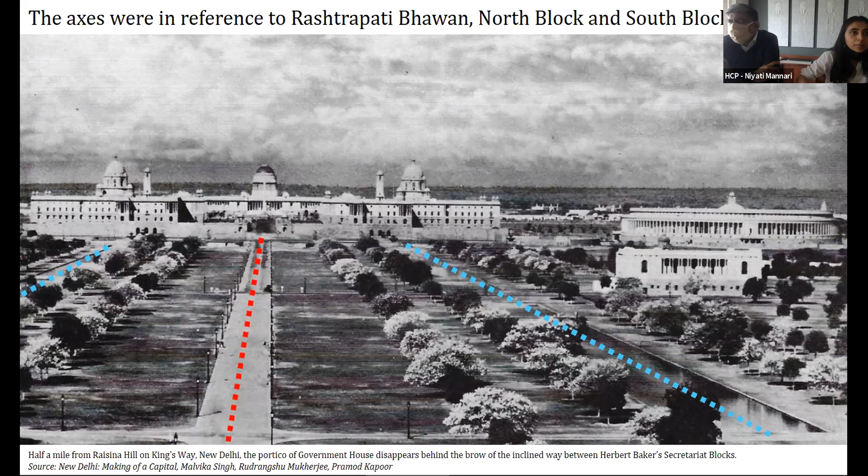So when we reconstruct what was there just before independence, this is how the space was, and this is how the axes were. Now what exactly happened after independence to Central Vista Avenue?

The three axes still hold a lot of significance, but there are a couple of major additions that happened over a period of 70 years. We see the Rafi Ahmad Marg that came up later, the metro stations that are pretty recent additions to this place, the toilet blocks near Vijay Chowk, and at the far end, the National War Memorial.

All said and done, despite all of these additions, this still remains a great icon to the Indian Republic, a great tourist attraction for Delhi and at a national level, and a precious civic garden for the residents of Delhi.

However, having said all of that, the avenue currently is under much stress, lacks amenities, and is in a state of disrepair. So let's come down to the proposal.

For the proposal, these are the six objectives we laid out: refurbish, strengthen, and restore its landscape; provide amenities; make it more pedestrian friendly; provide space and facilities for vendors; ensure arrangement for national events; and ensure the integrity and continuity of the avenue's original design.

This is what Central Vista Avenue is today. We have Vijay Chowk on one end, India Gate on the other, Rajpath in the center flanked by lawns and canals on both sides, and some underutilized areas behind the canal. Let's go through each of these layers one after the other.

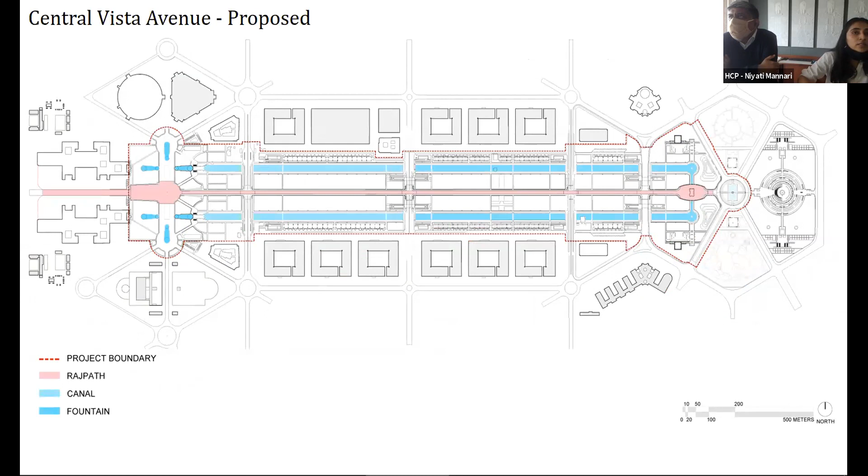This is the entire project boundary. We have Rajpath, shown in pink, the canals and fountains at Vijay Chowk, and the historic elements mostly near Vijay Chowk, but also India Gate on the other end. We have the axes, the primary and secondary roads, and the parking areas, which are completely landscaped.

We have paths and plazas along Rajpath, and paths and plazas elsewhere across the entire spread, underpasses at two areas, amenities and vending zones, grass mounds and step plazas, and presidential dais for the Republic Day parade.

We also have lawns, the existing trees, and the proposed trees. When we put all of this together, this is what we get - the overall master plan for the Central Vista Avenue as it is going to be proposed, with all the components that fall into it.

Now, when we look at the section, this is how the whole space would look like. We have the Central Secretariat campuses on both ends, with Rajpath in the center, and we can see the Rashtrapati Bhavan and North South block in the backdrop.

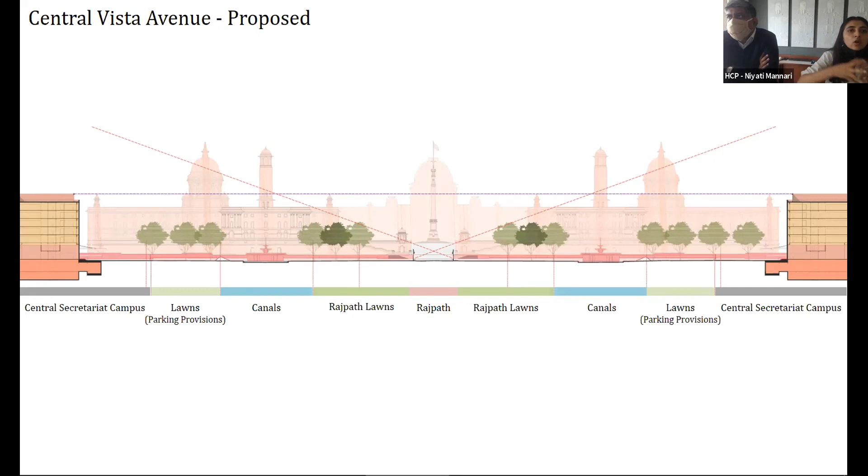We have lawns on both ends, canals, the lawns with parking provisions on the other side, and so on. For better understanding of this entire project, we have divided it into three main zones: the Vijay Chowk precinct, the typical avenue, and the India Gate precinct.

So we start with the basic land use. The overall land use of the space looks something like this, with these underutilized areas behind the canals, which we don't see from the main photographs or the forefront of the entire avenue. So this is how the area looks like.

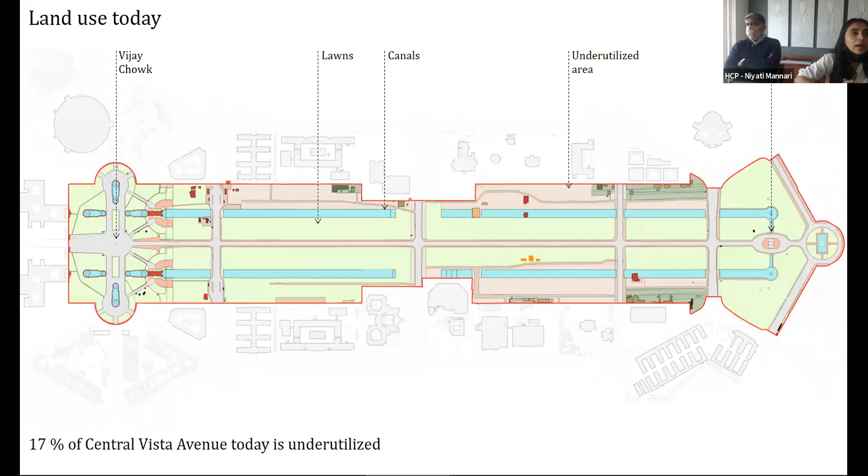There are many other areas behind the canal that are pretty underutilized and poorly maintained. All in all, the land use today has around 17% underutilized areas, the ones behind the canal. And all of this would be appropriately landscaped and well utilized in the master plan.

Now coming to Rajpath. When I'm talking about the next segments, I'll zoom in to this particular red box that you see here to have a better understanding of what exactly we are trying to do and what the whole intent is.

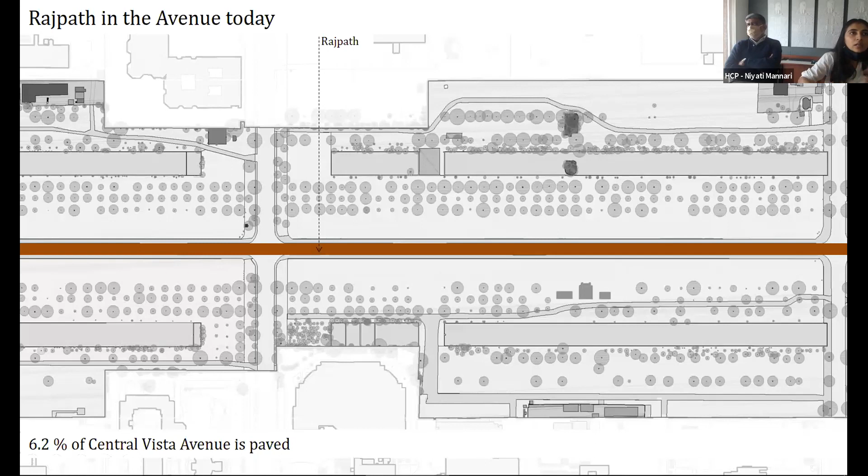What we intend to do is have paved walkways along its edges. The Rajpath you see today has these loose bajri edges. And this is what we intend to do instead: red granite walkways, with bollards, light poles, signages, etc. on one of the edges, and water channels for drainage from the lawns especially.

Now the Rajpath lawns. The lawns are actually worn out by pedestrian traffic. They lack modern water-saving infrastructure for watering. Their surface slopes are inadequate, and they are heavily disrupted during the Republic Day parade arrangements, which lasts almost a quarter of the year. So the Rajpath lawns today are spread across something like this.

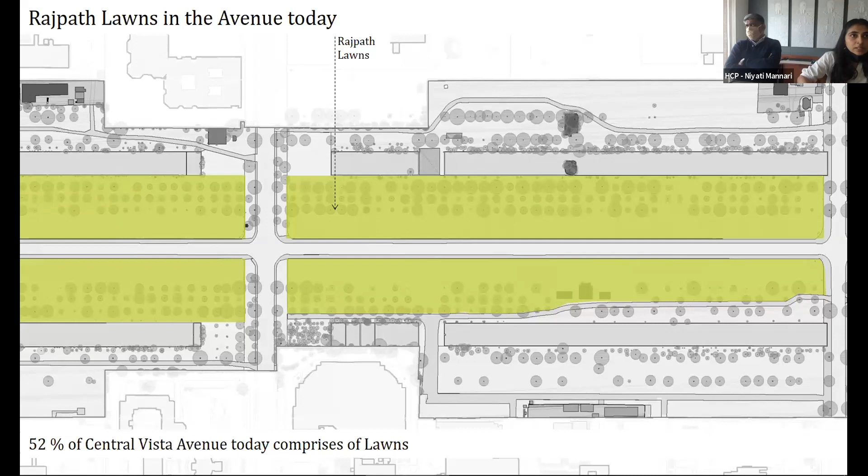What we intend to do is have it well laid out, cover a larger area than present, and make it a little more convivial for pedestrian usage. So we add a couple of walkways along its edges, as well as a few perpendicular ones. This refurbishment, along with these walkways, would eventually liven up the space.

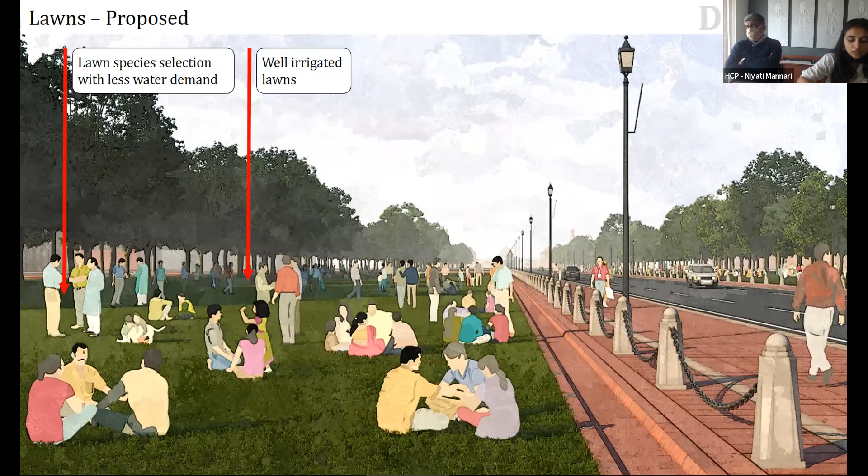So the lawns that we see to be like this today would eventually be like this: well irrigated lawns, with species selected which use much less water. Perpendicular walkways would be present at some locations, and we would have water channels for stormwater drainage, as I mentioned earlier.

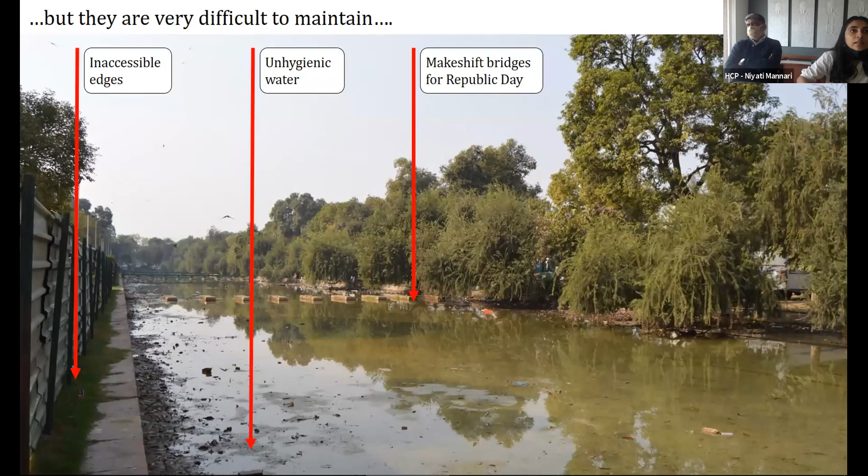Now talking about the canals. These are very much used for boating at particular areas along the entire stretch, and for swimming during the summer, but unfortunately they are difficult to maintain. They have some inaccessible edges, the water is unhygienic, and there are makeshift bridges put up temporarily for the Republic Day parade. They also lack a reliable source of water, so they are dry quite a few times of the year.

Tree plantations and other features don't allow you to easily promenade along this beautiful water feature. These makeshift bridges are done for the Republic Day parade, and this high number is right behind the VIP and VVIP seating enclosures, so you suddenly see a huge number of temporary bridges put up.

So the avenues and canals are actually very important features, but they are poorly maintained and not easily accessible. What we intend to do is have refurbished canals with walkways along them and bridges at close intervals. These bridges would also have a dual purpose, being used during the Republic Day parade celebrations as well. We also have a green buffer here, which I'll come to in the 3D visualization.

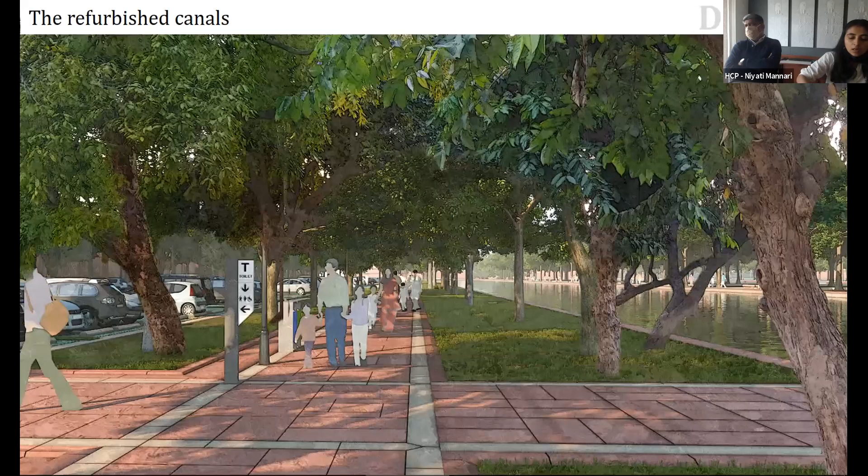So the refurbished canals would look something like this. We have a green buffer here, keeping the existing trees in mind. We would like to have minimum transplantation of trees because of any intervention that we do here, so the green buffer is in that regard.

And then we have the walkways to promenade along the canal, then a strip for utilities such as lampposts, signages, dustbins, etc. And then another green buffer eventually that leads to the landscape parking area, but that green buffer is again owing to the existing trees.

So as I already mentioned, we have— Niyati, can you go a little slow? It's fine, sure, you don't need to hurry. Just explain and pause at the key slides. Don't run. Sorry, so I'll keep it slow.

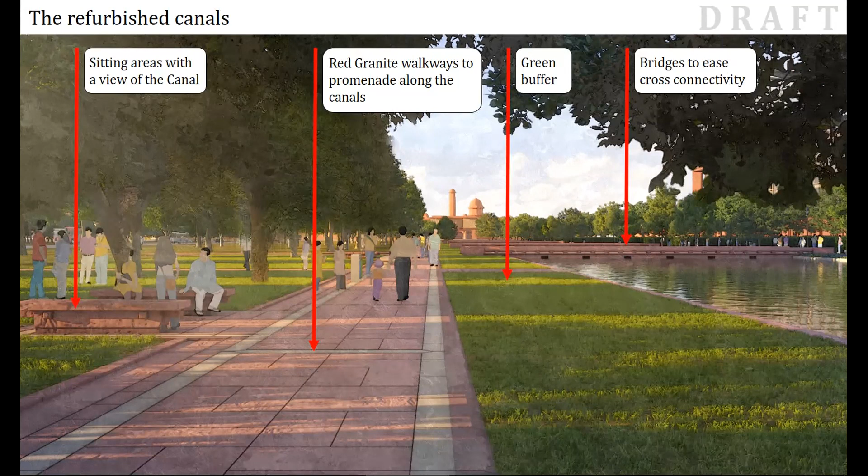So we basically have these bridges for cross connections, and then the green buffer. A few places don't have trees along that, but we'll of course maintain the green buffer. Then you have the red granite walkways to promenade along, and a few seating areas with a view of the canal to be enjoyed.

So we only see public conveniences near Vijay Chowk and a couple near India Gate. When we map it out, this is how it looks. We have 2 toilet blocks here and 2 toilet blocks here, and they're of course insufficient for the amount of area and footfall it witnesses.

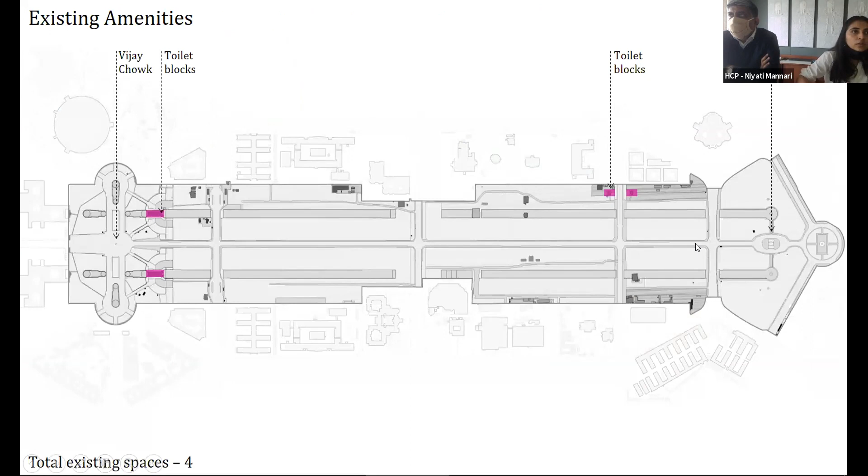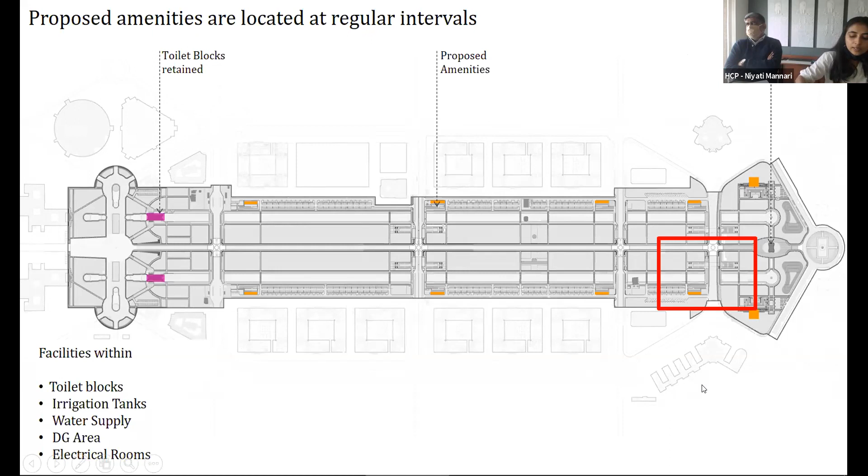So what we propose is to have all of these in orange that you see as the proposed amenities, and these are the toilet blocks that we would like to retain. These facilities basically have these many facilities within them - toilet blocks and all the services as mentioned in the slide in this particular place. Now I'll be zooming into this red box to see exactly what the design is.

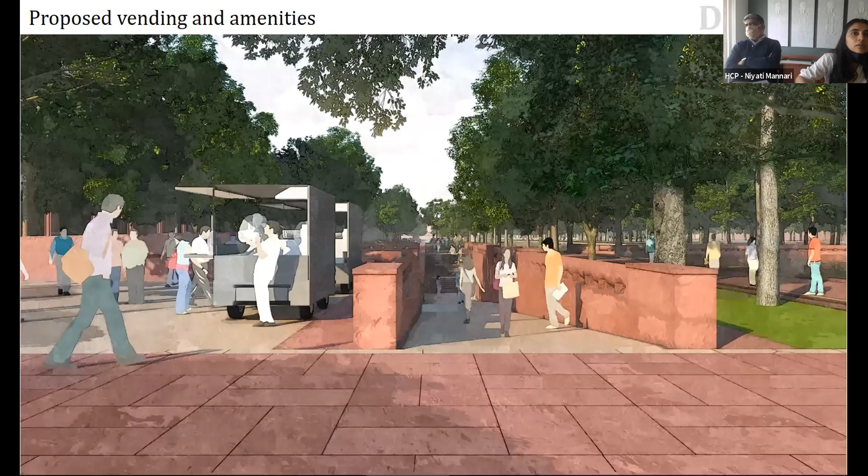This is the area where you have access to the lower level amenities. The organized vending plaza, as I mentioned, would be here. And this is going to be quite a shaded area because of the existing trees and also some of the proposed ones.

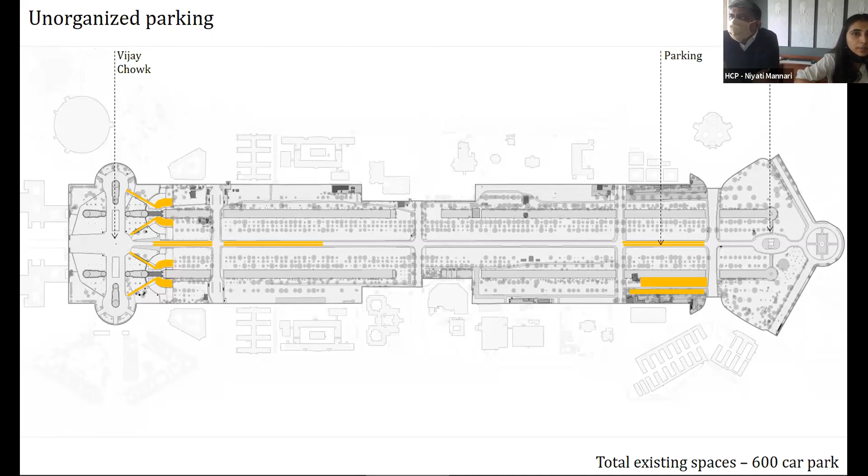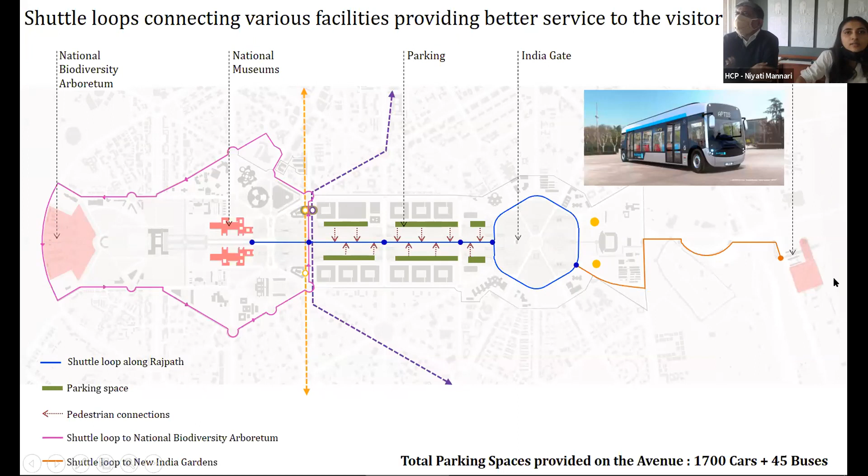So the area behind the canals that is currently underutilized is eventually imagined to be a space like this - a very landscaped area which could be dually used during national events and special events that need a lot of parking spaces. This will be shaded parking bays with grass paver parking bays and the driveway also made in grass pavers.

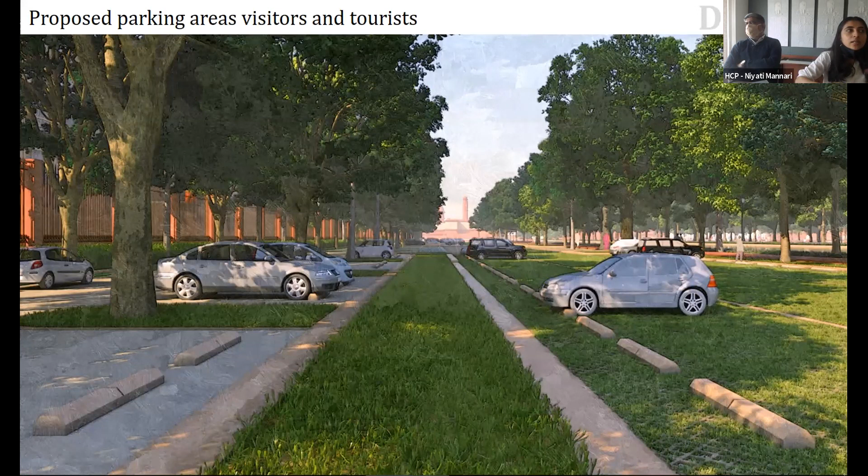The proposed parking areas for the visitors and tourists would actually have a green buffer. The other side of the entire parking space would be like this - you have the driveway, shaded parking bays and the green buffer as well.

So the area again in question beyond the canals looks something like this today, and this is the connection that we are providing with the parking space. You can see the green parking here, and then you have the pedestrian connections, and the rest I've already mentioned.

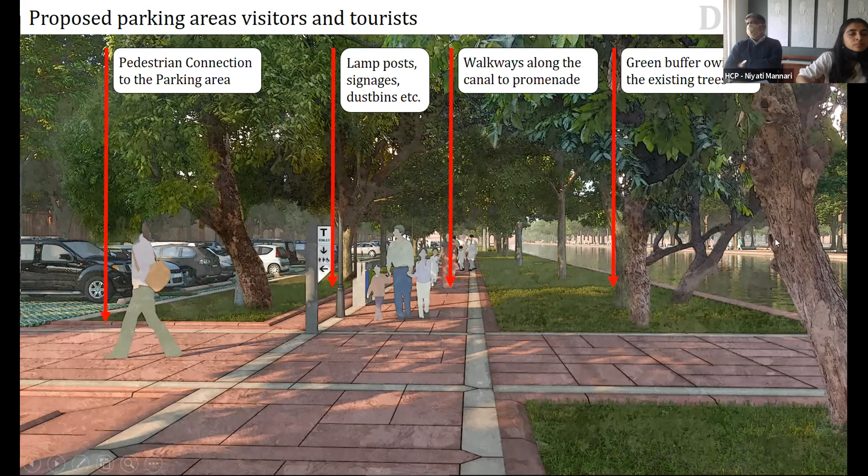The pedestrian underpasses that we would like to propose are at these two locations - the Janpath Rajpath junction and the C-Hexagon Rajpath junction are the areas where we are proposing these pedestrian underpasses. And when we zoom in, this is how the underpasses would look like.

The design of the underpass has been done in a way that it falls between the existing rows of trees, so there's minimal tree transplantation that happens because of anything we intervene with here. So this is how the underpass looks - you can see the stairs, the landing, the entire area that goes below, and then you have this entire space that is below Janpath, and then you can just come out from this particular space.

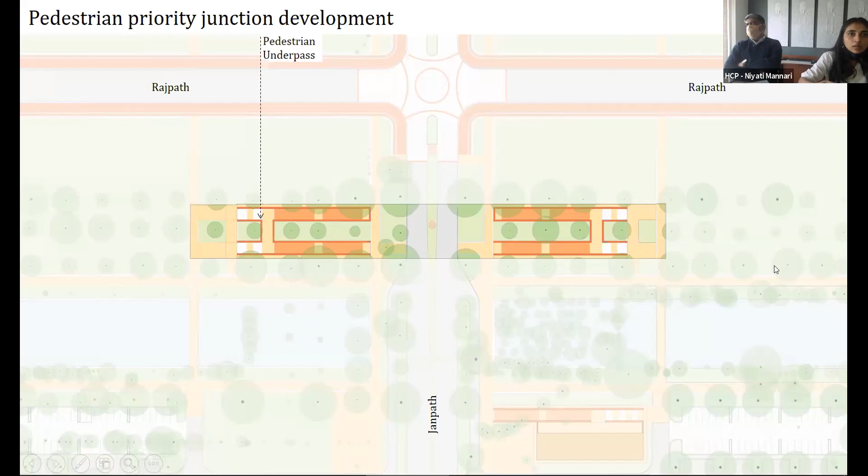So how this has been designed is something like this. We have a 2-meter buffer that we are considering from the existing tree trunks, and the whole area has been designed and placed accordingly.

So the area between the avenues of trees would eventually look something like this. We have the underpass at the junctions, shaded by the trees on both sides, with signages and more utilities such as lampposts edging it.

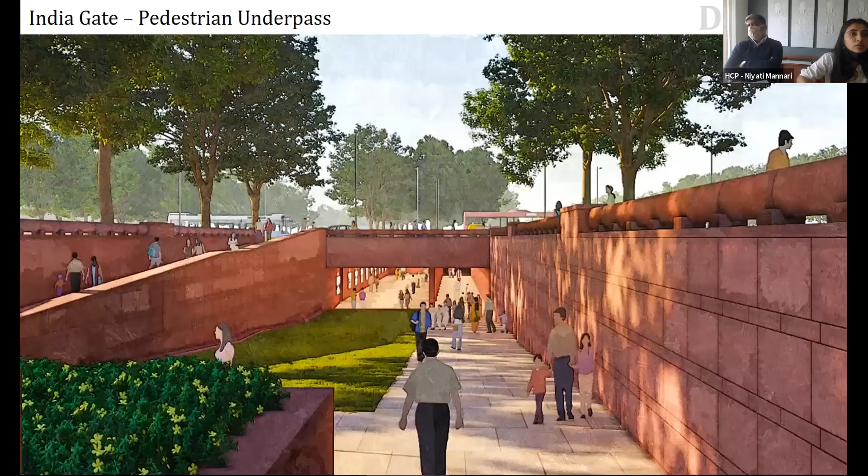Another view of how this space could look from a different angle would be something like this. And from within, or rather below the roads, this is how the space would be, which can also have a dual purpose of hosting exhibitions and small artistic gatherings.

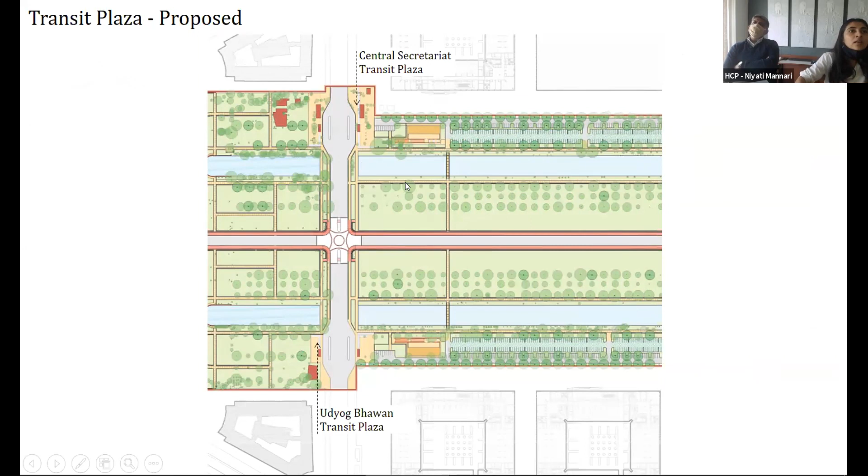And this is the area in reference. The area that looks like this today, we eventually intend to make a little bigger, like a plaza, with more facilities and utilities for people to have a better convivial space there.

This is the transit plaza. You can see the Central Secretariat exit gate here. There are organized vending spaces, public utilities such as benches, ramps and stairs for universal design access, and bicycle and Yulu stands. You also have a separate bus lane and another service bylane for paratransit modes of travel.

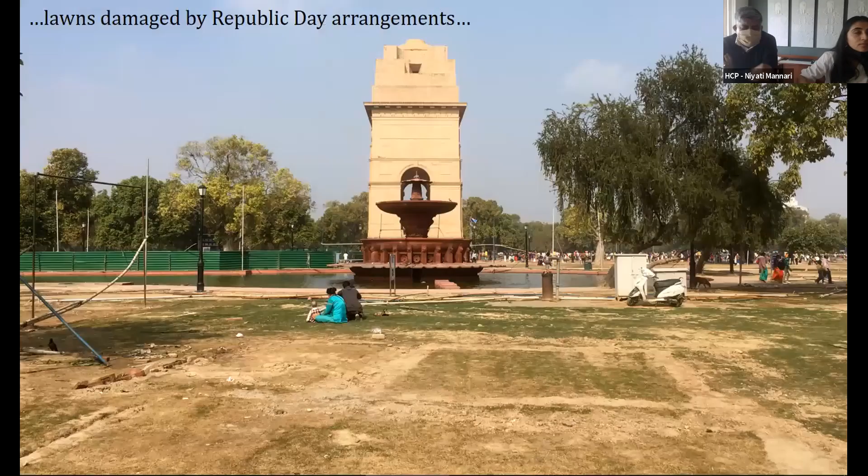But the area is still ill-equipped to handle this footfall. There is barricading for security purposes, temporary check-ins and security kiosks for entry and exits in this area, and the lawns are damaged by Republic Day parade arrangements.

You have India Gate parks on both sides, with landscape elements such as step plazas and grass mounds, with amenities behind these plazas as well. There are also more landscape elements that we'll see in the visuals further.

When we talk about the pedestrian underpass, these are the underpasses we are planning. C-Hexagon sees a huge amount of pedestrian traffic and becomes unsafe for people to use. When we zoom into this space, the basic fundamentals and principles of the design remain the same—we have designed it between the rows of trees.

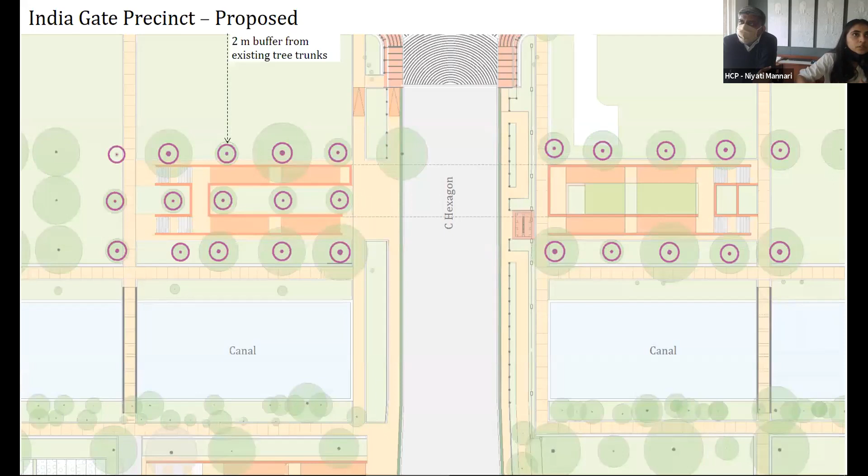The shaded part remains as it is, with minimum tree transplantation there, and the 2-meter buffer. This is how the whole space looks from below the ground level. This is the area in question.

So basically the whole idea of this underpass is to not just be a transit mode, but a public space in itself. The width, the facilities within it, the well-lit, well-ventilated areas have been designed in such a way that it does not seem like just a mode of transit to cross the road. That's not how we have thought about it—this is going to be a public space in itself.

Now talking about the India Gate Plaza. This is how the street that leads to India Gate looks like today, and this is how we envision this space to be. The plaza would be wide to accommodate the footfall, with motorable paving for national events, and hydraulic bollards that can go down only during national events.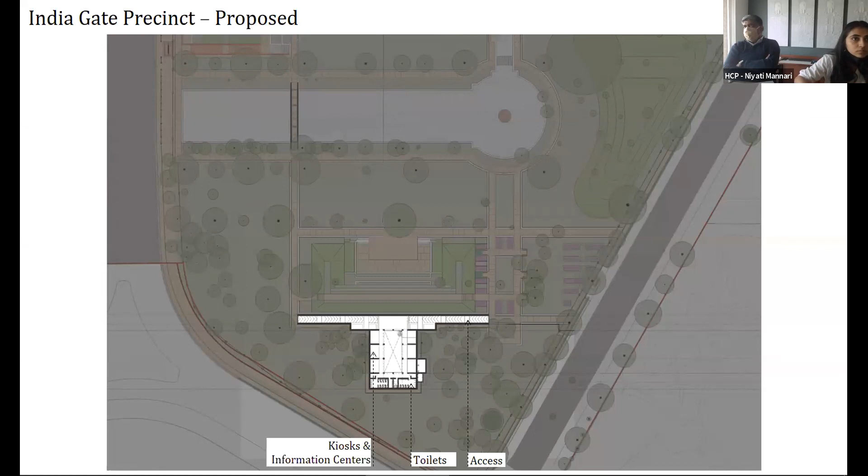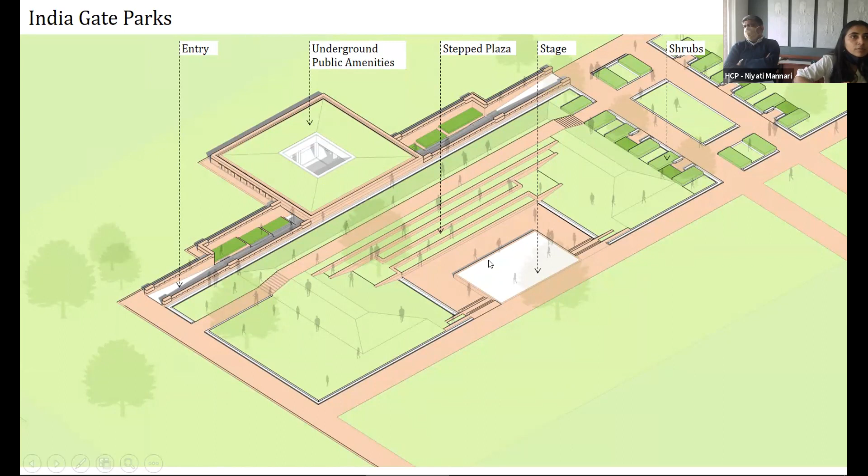This is another isometric image of the same. This is the stage for the step plaza, this is the seating area, we have shrubs and planters on this end, and walkways connecting this entire space. This is the entry to the underground amenities, and we have the green buffer on that end too. When we look at the area below ground level, this is how the space is, with a courtyard in the center and all the facilities on either side.

So the area that looks something like this would eventually be looking like this. You have India Gate here behind the trees, the grass mounds that surround the India Gate Step Plaza, and the entry to the amenities here. This is the entire space.

Another angle of the same area, and this is where we intend to have the step plaza, the stage for performances. This does not have to be a very formal space. It will just have India Gate as a backdrop, but it will be a public space for people to enjoy, for light performances and for regular daily usage as well.

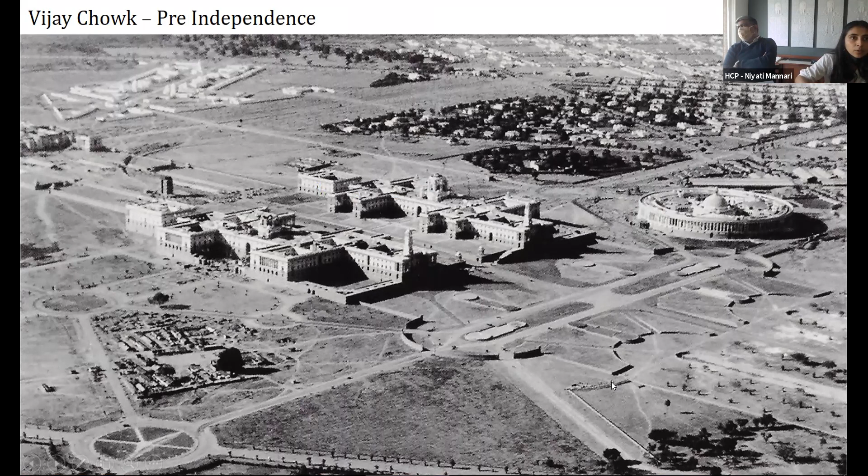Now coming to the Vijay Chowk precinct. A few beautiful images of Vijay Chowk pre-independence. This is one of those areas, this is Vijay Chowk here. We have the parliament, north and south block, and the rest of the area was not developed at that point. This is how the space used to look like.

We have stepped arches here, 3 arches that are currently hidden by the increase in road levels. I'll talk about it further once we reach there. This is how the whole space looked like, and this is one of the early images around independence, somewhere between 1947 and 1950. This is how the space looks like today.

Vijay Chowk's original formal grandeur and austere beauty has been much marred by unthoughtful additions and alterations. This project basically intends to restore the heritage character of Vijay Chowk. These are the 6 things we intend to do in order to restore that heritage character. I'll go through them one by one.

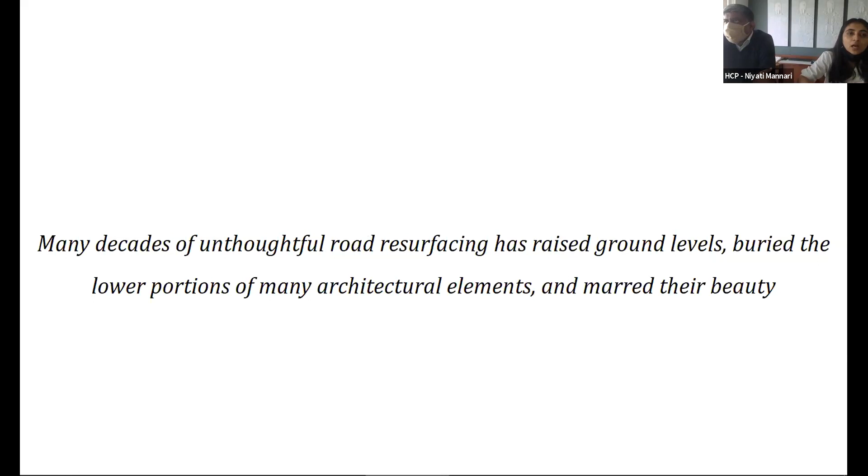Many decades of unthoughtful road resurfacing has raised ground levels, buried the lower portions of many architectural elements and marred their beauty. This is a beautiful image from 1927 showing the levels of the original road with respect to the Vijay Chowk fountains, and this is what it is today. The road has basically risen by 7 inches, making the beautiful fountain no longer visible as a whole. The three arches I mentioned used to have 5 steps, and now all we can see is these 3.

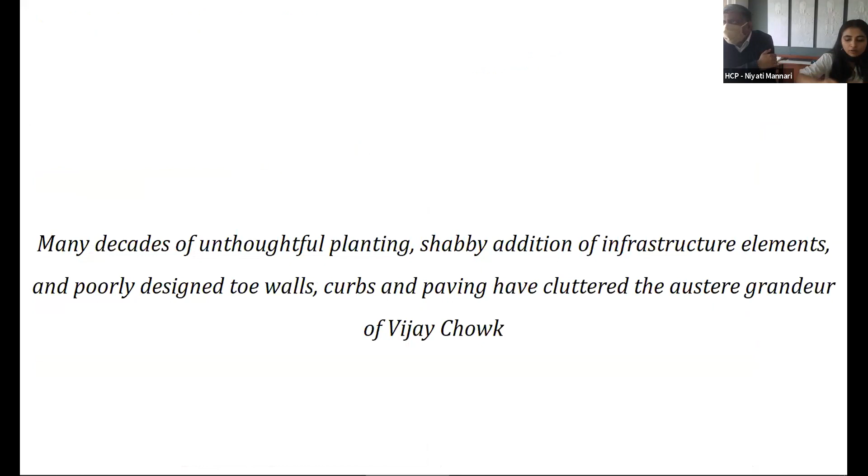So these steps are buried due to the rise in the levels of the greens, owing to the rise in the level of the roads. So many decades of unthoughtful planting, shabby addition of infrastructure elements, and poorly designed toe walls, curbs, pavings, etc. have cluttered the austere grandeur of Vijay Chowk. We'll have a look at all of those.

Now when you see here, the addition of these shrubs mar the austere grandeur of the architecture behind it. These poorly detailed facade lighting mars the architecture of the north and south block walls. Unthoughtful topiary plantations along the edges of all these historical elements can be clearly seen around the fountains and here along the toilet blocks. This is the area that leads you to the toilet blocks, and here also there are unplanned hedge plantations obstructing the access to the lawns, unnecessary addition of toe walls, and shabby road resurfacing that has been done.

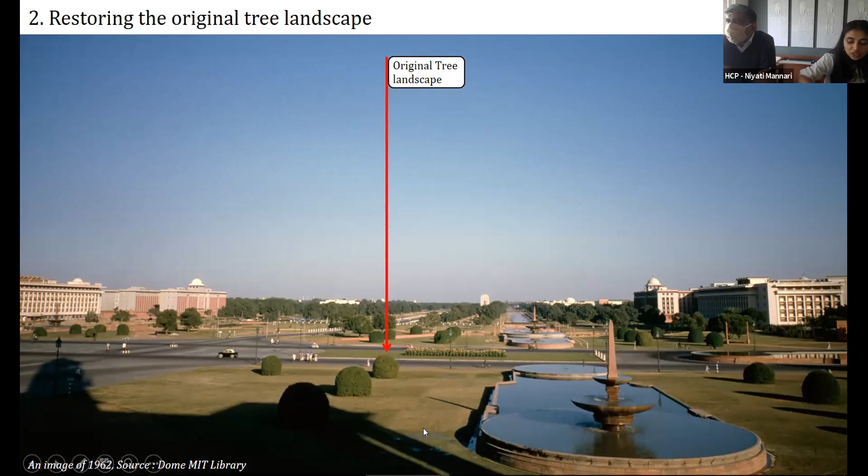This is again an image from 1962, which shows the original tree landscape around this area. Here you can also see that the road levels were pretty much at the same level as the greens, and even here you can see all of those levels pretty much there. But there are all of these additions that have happened now. So basically the unplanned plantation has marred the beauty of this entire historic precinct.

Now the original pavings and pathways will also have to be restored. So this was originally planned as a pathway, but now is an asphalt road and is serving a dual purpose of parking spaces as well.

Protective plinths will have to be added to this area to protect the heritage structures and prevent unthoughtful planting. So all of these areas where we see this ad hoc planting hiding the grand austere structures behind them need to have protective plinths basically.

An integrated, efficient infrastructure network would be laid out to ensure clean, hygienic water throughout the year. So we would intend to make the fountains functional and hygienic. There are some incoherent architectural additions also seen in this place, so those would also be worked out. There's poorly maintained water and loose cabling that we see across the fountains.

And finally, there will be improvement in the traffic management infrastructure. The badly placed canopy that you can see here mars the whole symmetry of the road. So all in all, the Vijay Chowk precinct looks something like this today.

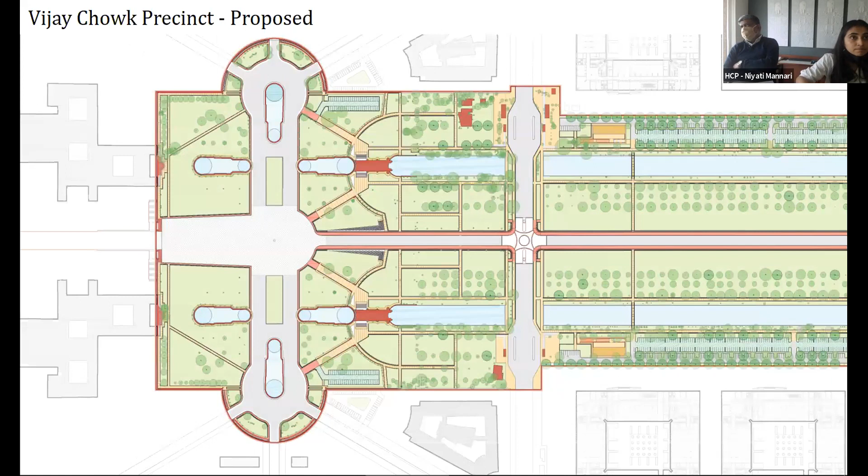And this is how we envision this space to be. When we look at it in 3D, this is how the space is imagined. We basically make the fountains functional and hygienic, improve the overall traffic infrastructure, and restore the original road levels.

We'll be removing all the ad hoc additions in terms of toe walls, hedges, and plantations that I mentioned in the earlier slides from this entire area. Protective plinths and pathways would be added, and the original paving and pathways would be brought back to their form.

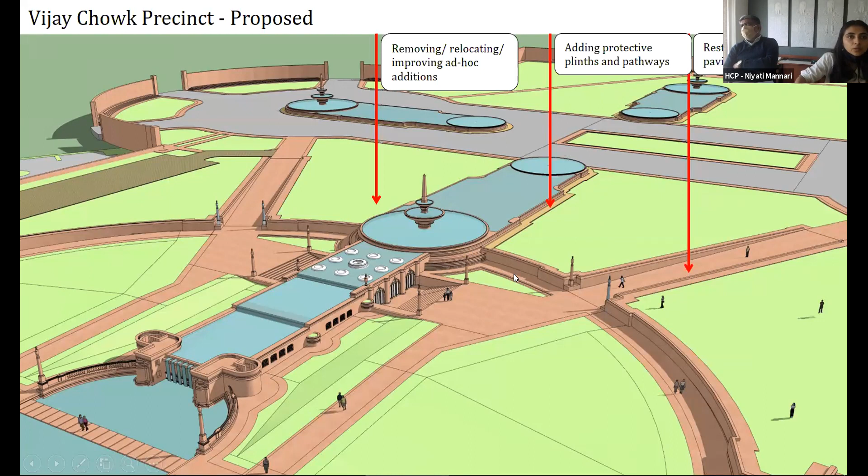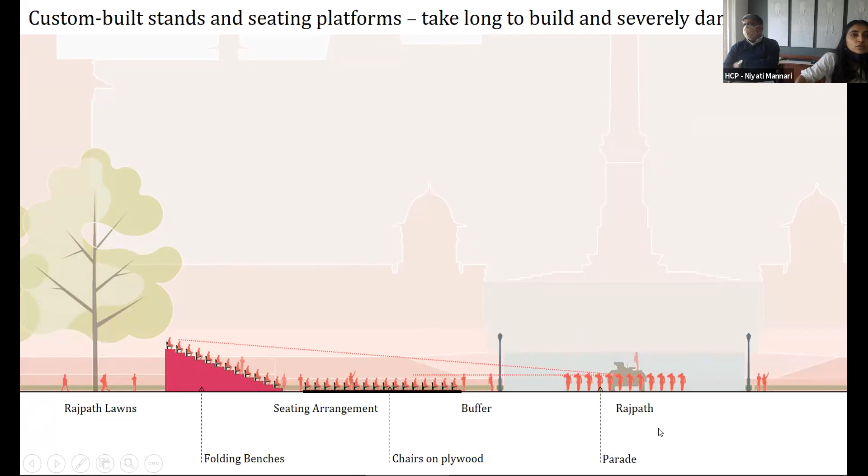In section, this is how this space looks. So you have Rajpath, you have your green buffer here, and then you have these chairs on plywood, which basically severely damage the lawns. Then you have these folding benches right behind it, and the parking and canals happen behind that. So this is how the arrangement currently is.

Standardized and rationalized arrangements for this entire area so that it takes minimum time to set up and dismantle, and does not severely damage the lawns. So this is how we envision this space to be. You have these standardized bleacher modules that are just brought in, placed on site, and easily dismantled and taken back. So it takes much less time to dismantle and set up, but at the same time, it is at a higher level from the landscape, so it does not damage the landscape.

I'll show you some 3D visualizations to understand this better. So what we see to be something like this today would eventually look something like this.

What we have here are robust crowd control measures, that is the barricading we see today, and these standardized bleacher modules. As you can see, these are not going to be damaging the lawns because they're not exactly sitting on the lawns as is done right now. And the security buffer is maintained as present.

But having said that, the crowd control measures or barricading are provided as inserts within the walkways. So these barricades need to be basically just put into these inserts, so you are not disrupting the lawn. This provision has been made for that.

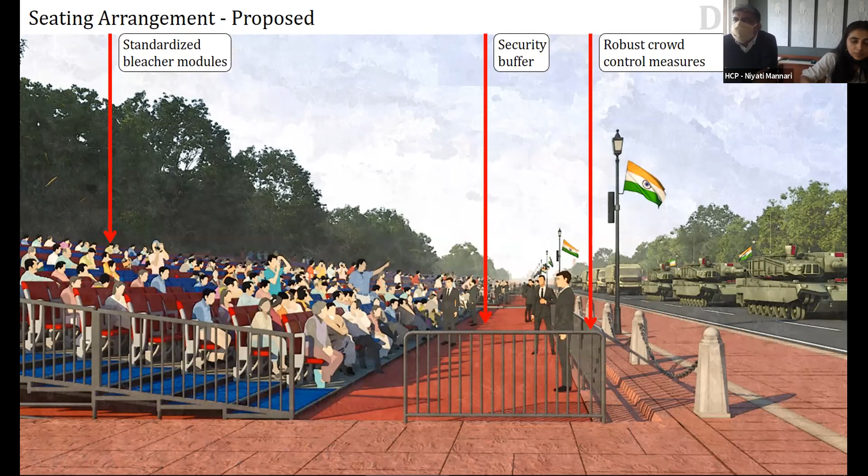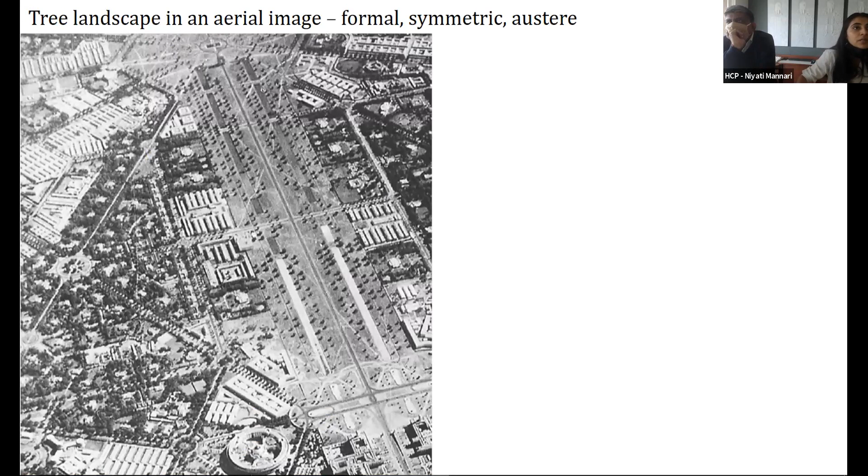Coming to the tree landscape: this is an aerial image of how formal, symmetric, and austere this tree landscape used to be. A very beautiful image from the 1960s that explains the same. As you can see, we have these rows of trees, very close to what was originally envisioned by Lutyens. It was still in the 1960s following the same pattern.

When we reconstructed that aerial image into a drawing, this is how the original tree landscape looked, and this is how the grid pattern was worked out. The array of crosses on both sides of Rajpath had a serrated pattern of trees, and these were the species palette at that time. The entire Rajpath space was full of Rai Jamuns, and in this area you could still see three different species: pines, Bistendu topiaries, and Maulsari.

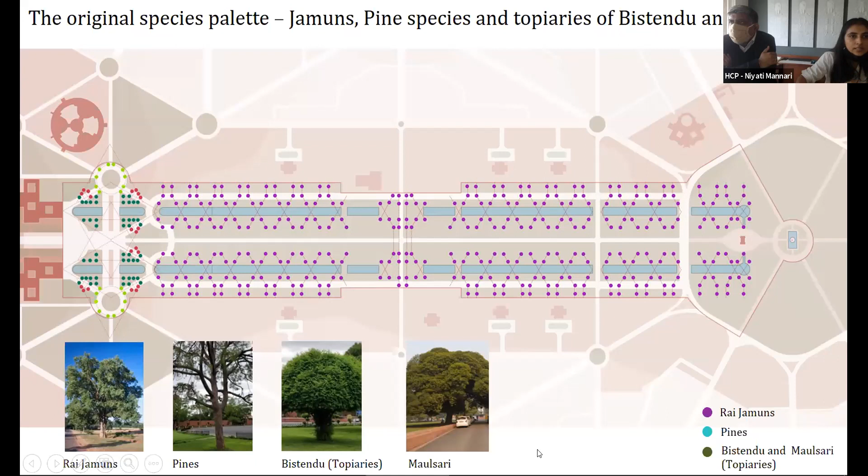Now, over the years, haphazard planting has destroyed the original formal order, symmetry, and austere grandeur of the Central Vista Avenue's tree landscape. So something that used to look like this was the original tree landscape.

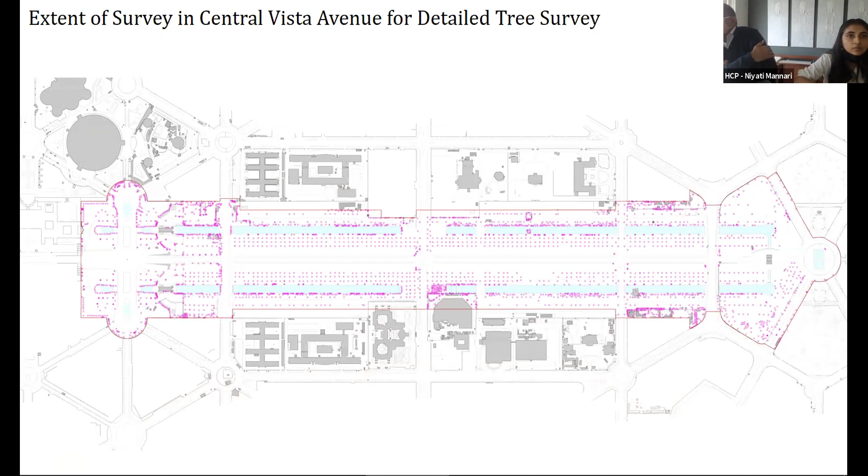After carrying out a very detailed tree survey, this is one of our survey drawings, and this is a more detailed one with the actual canopy and girth size. We have mentioned all the trees here with respect to large, small, and medium trees with flowering deciduous species, all of them mentioned here. And this is what we see today.

This is the present tree landscape, which is far from what was originally envisioned by Lutyens. Currently it has become a haphazard jungle, as evident from this image. This is based on the survey carried out in the last couple of months by our team here, and this is as per the definition of the Delhi Preservation of Trees Act 1994. This is the actual situation today.

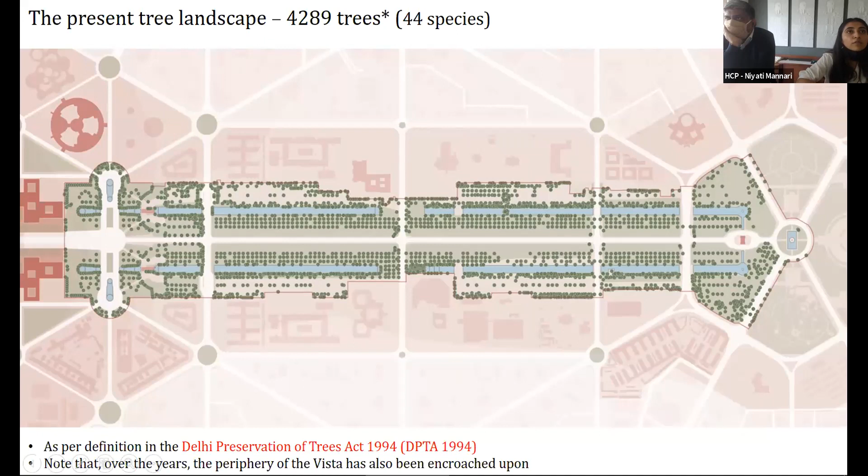So a new draft tree master plan of Central Vista Avenue aims to restore and enrich the formal order, symmetry, and grandeur of the avenue's tree landscape. This tree master plan would be gradually realized over a period of time. The design principles include an iteration of Lutyens' cross pattern with more trees and a new palette of tree species. I'll talk about each of these as the slides go by.

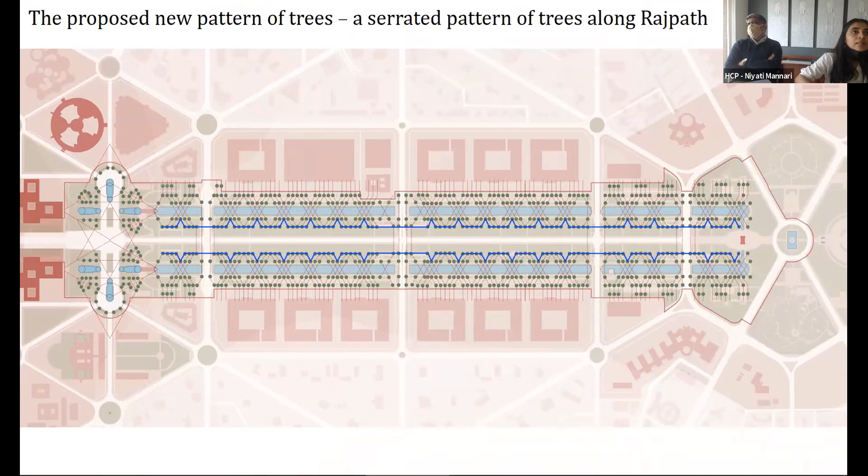So the proposed new pattern of trees would be 962 trees on the avenue, and this is how the serrated pattern of trees would look like. The Lutyens trees within this new pattern are the ones you can see in green.

Now when we talk about species, we have the new palette of tree species. We have the Lutyens Rai Jamuns, and then the additional Rai Jamuns, most of which are already there. So when we look at each of these tree palettes we are going to discuss,

we are looking into the phenology, character, and socio-religious significance. Basically, we would like to look at the foliar character and not just the flowering aspect of it. So the Rai Jamun has these characters.

Then the dots you see in red would be the pilkhan, and it has this spectacular reddish bronze foliage that you see around March through mid-April. And then you have these foliar effects beautifully shown in these two images.

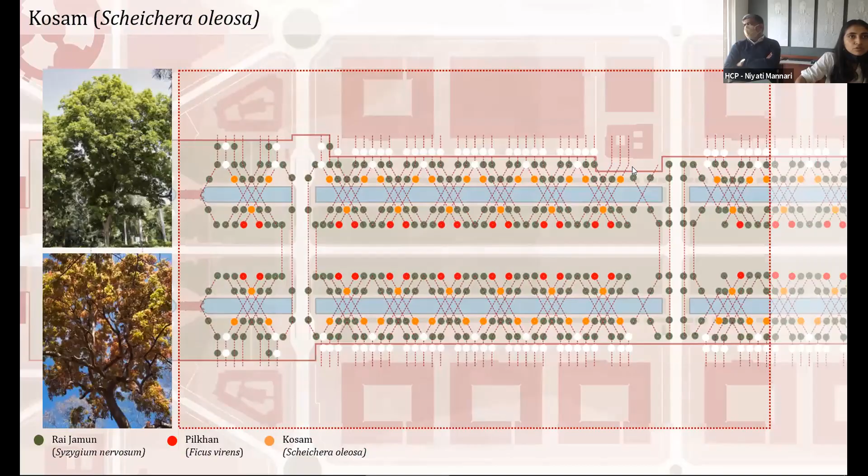And then there will be the kosam, which will be at the edges of the canal that you see in orange. Kosam again has this reddish brown, bright new foliage that happens around mid-April, March to mid-April, and these renew themselves in March. The socio-religious significance is also strong in terms of medicinal properties and its worshipping.

Now the Amalthas is planned to be at the edges of the Central Vista Avenue, more towards the compounds of the Central Secretariat. And we all know Amalthas has this beautiful yellow character during the summers.

Then we plan to have Semal around the edges again, and then we talk about Kachnar, which will be along with the Semals in the same line. And this is how the tree with the flowers looks like.

And then we have the Barna, which is again going to line up in the same area. The new leaves and flowers bloom in April, and then you have the burst of flowers in spring.

Now talking about some urban elements, street elements such as lighting and signages. Currently on Rajpath, the area is not well lit for a public space. The lux level comparisons were done by one of our consultants, and this is what we found on site.

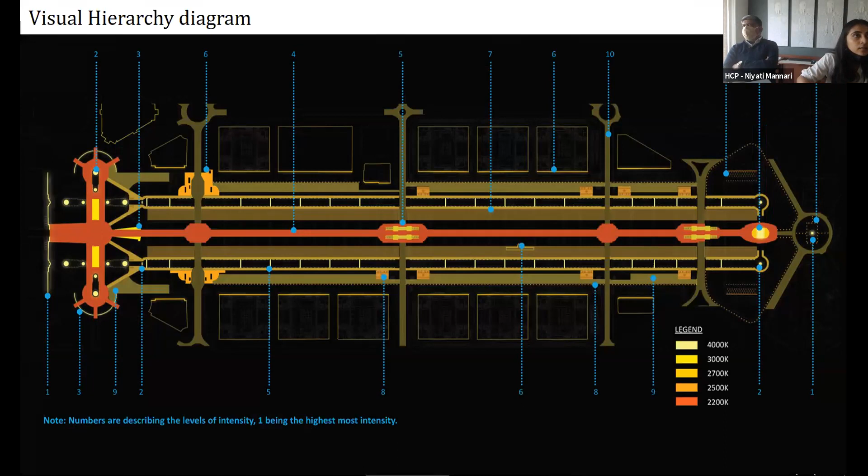So what we proposed after a good analysis was to come up with this visual hierarchy diagram. It is pretty clear, one being the highest and ten being the lowest. We have the warmth of the lighting designed, and then we have the main vistas and focal point diagram, with near view, mid view, and far view all mapped.

And a few visualizations of how the well-lit spaces would look like. This is an image of the India Gate Plaza. The areas along Rajpath, we have walkways along the canals, and this is how the entry to the amenities block would look like.

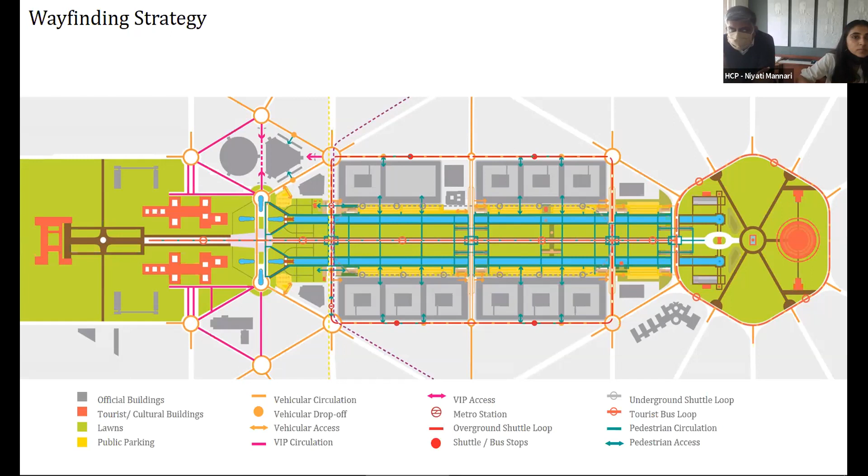About the wayfinding strategy, the foremost thing is to map all kinds of flows that happen in this space. So this is one map showing all of that. We have mapped the public parking, vehicular circulation, pedestrian circulation, VIP accesses due to the ministries, all the metro and bus stops and routes being carried in this area, and we have a wayfinding strategy pulled in.

So we are eventually using, majorly for Central Vista Avenue, the primary streets and pedestrian connectors that are most important to this space. And this is the sign family that we have come up with after that.

So you can see how the whole area would have signages of this kind. The Central Vista map is basically on pillars which are inspired by the cast iron pillar in Delhi. This is how the maps would be on them, and a few visualizations showing how the space would look like with the signages in it.

And there's a signage type choice that we have made. We have November as a typeface, which has been developed specially for this particular project. And this is how it looks in English and Hindi.

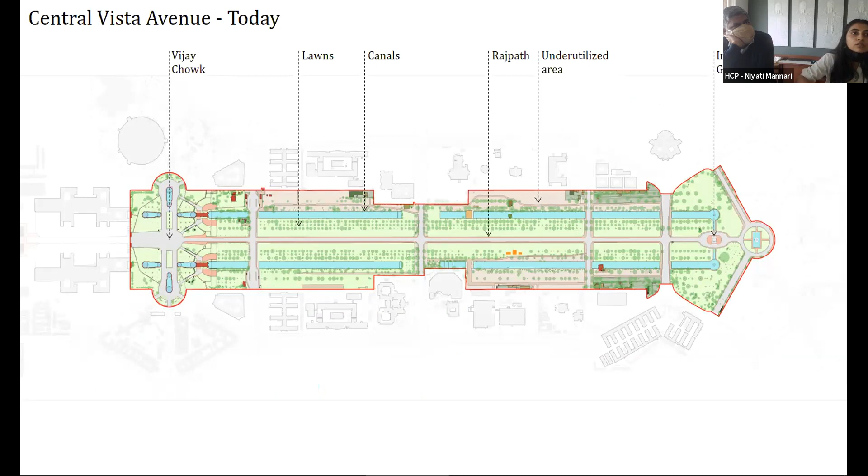So to wrap it up, these are our 6 objectives. As I've mentioned earlier, we intend to retain the character of this space as it is, but add facilities, amenities, and utilities so the space becomes far more convivial than it is today. So the Central Vista Avenue that we see today looks something like this. We eventually intend for it to look like this. Thank you so much.

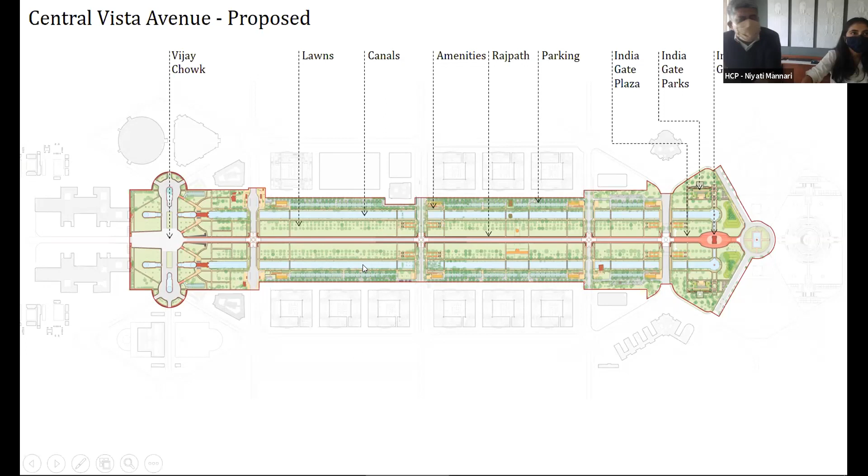Good afternoon, Aditya, and good afternoon everyone at Isola. I'll just go back to one of the original slides of Lutyens. If we can go back to that, I'll explain. Niyati has explained the design, but I think it's also important to understand this.

This is one of the slides. It's very important to understand how the planting was done, because Niyati was talking about iteration to the Lutyens grid. We have to understand in this slide the tree planting. I'll annotate a few things. The vista actually is, I hope everyone can see, this is the main Rajpath vista that one generally sees in all the national events, and most of us have gone in our childhood, or go to these lawns enjoying the night time, especially during summers as well as the afternoon in winters. So one has to understand how the spacing of these trees was done by Lutyens.

So the spacing, when one studied through all this - I never studied that earlier, but while doing this project I had a chance to understand the vista and how tree planting is done in a vista. It was very interesting to study that when we talk about a vista, generally after a few years the grass and landscape around the trees need to change. These trees are almost 25 meters apart. What we see today is additional trees in the center and a third row which has been subsequently added to the plan. So now, instead of the 2 rows and wider planting, we see a large number of species added to this. That's what Niyati was talking about with the iterations.

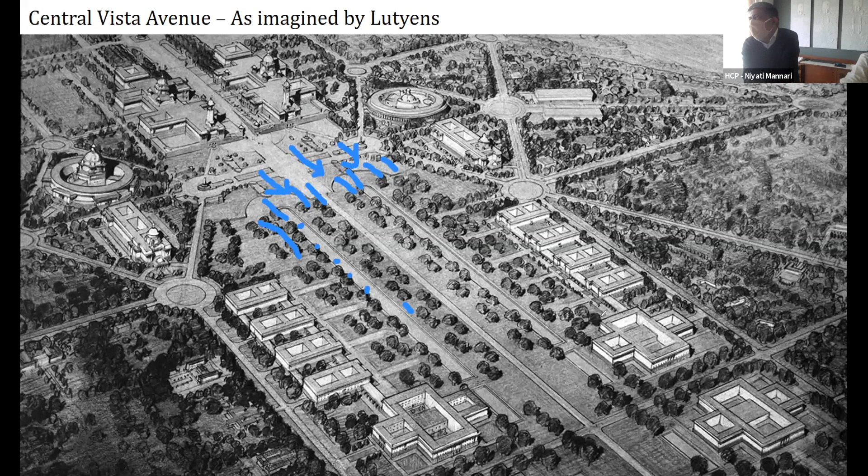Because of the number of parking spaces, as everybody knows, one is unable to access this area since parking is not available. Currently there's a peripheral road going all around these areas, from one road to another. That's why the parking has been proposed in that peripheral road itself—it's not that something new is being proposed there.

In case of special events, as Niyati was talking about, parking in grass pavers is used subsequently—if there's an event happening, that green area is used for parking. The reason for this parking arrangement is because we want to see this whole extent of green from one end to the other.

Except for the paths added along the canal, you see a complete stretch of green. The planting strategy was a long-term strategy, not a present one, because of the additional trees planted. So this vista is finally open to the public with all three avenues clearly visible. That's the intent of this whole landscape, the Central Vista Avenue.

Thank you, Yogesh. Pradeep, if you would like to say a few words about the trees particularly and the strategy for the trees. Can you hear me?

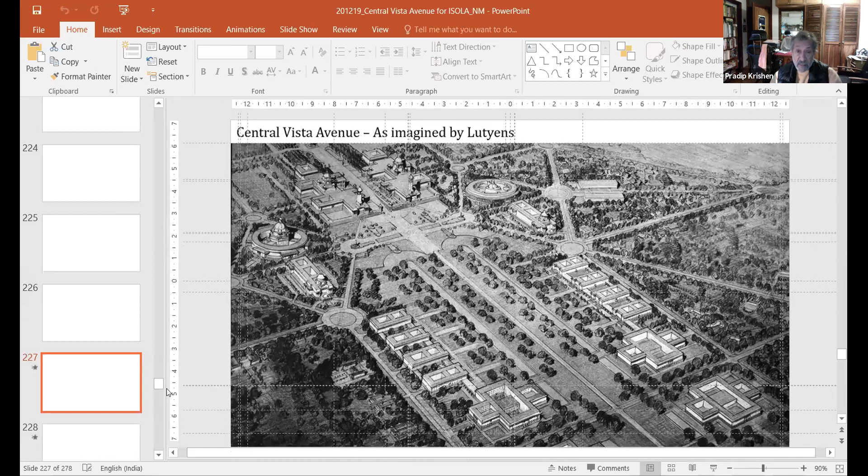That was one very important step HCP took in envisioning the avenues. The other was that I'm very happy they accepted my suggestion to use trees that are native, known to be completely at home in Delhi's climate and in this particular Bangar soil, so that once established, they would need no looking after, no watering, no nutrients. I think that ought to be the fundamental basis on which any tree is selected for planting in Delhi.

So the trees that Niyati showed you, starting with the Pilkhan, the Amaltas and the Kosam, and then the other three, were all taken for that reason.

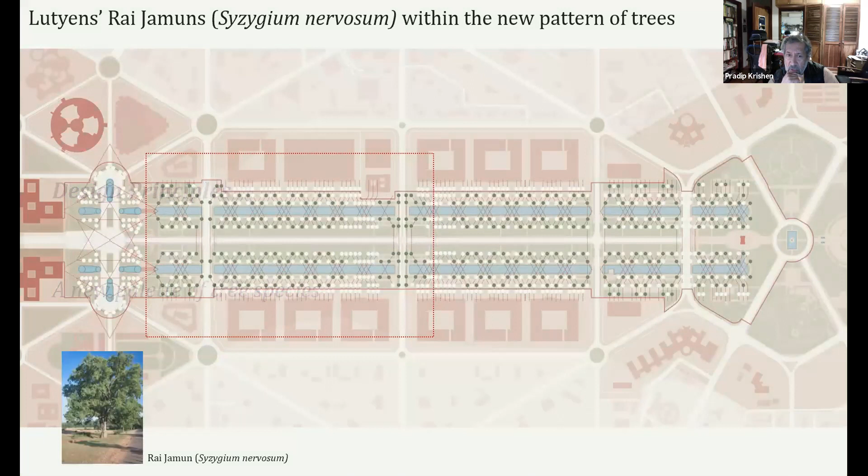For me, the primary motive was to use foliar effects in preference to flowering effects, simply because foliage effects last longer, and there's something completely magical about Delhi's spring. Starting sometime in March and going through till April, sometimes even into May, you get foliar effects that are really, really beautiful. I thought that if we could bring those foliar effects into Rajpath, it would be truly wonderful.

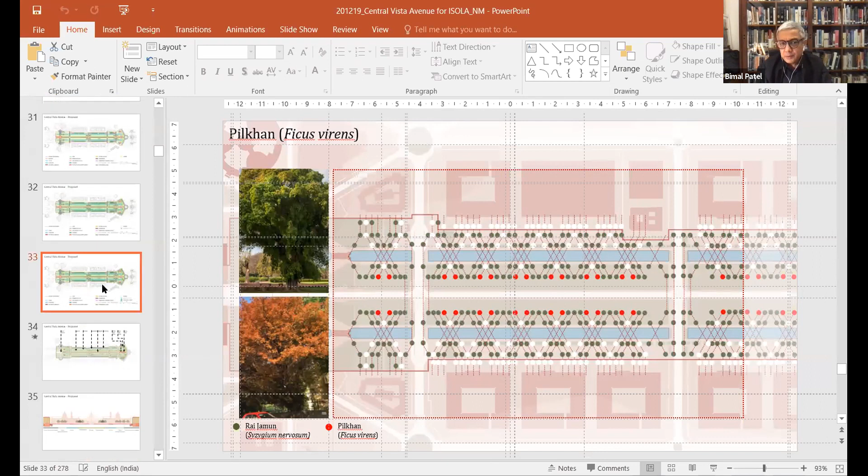Of course, there's nothing like completely original, things have changed over a period of time. There are a lot more trees, it's a different place, there are lots more people using it. So it will change, but we do not want it to lose its essential character, and that's what we have tried to do here. So I'll stop at that, and I hope that what I have said comes through in the approach we have, in the proposals we have shown you.

So I'll stop at that, Aditya, and let's go for the questions. Maybe I'll start with the first question since I have the mic here.

My feeling, one question was that the edges seemed like such a lost opportunity by just saving them for parking. I was wondering if the opportunity at this particular junction of redoing this great open space was to make it more of something than it is already, if there's a possibility to make it a greater place by adding more program and more interest. So Rajpath itself is a kind of vibrant street, and the other pathways people walk on.

Sujata, can you maybe mute? I wonder whose noise this is.

But I'm just wondering, is it possible to not have more program along the edges, maybe have some way to include more people instead of just relegating it to parking? And why is there this 17%, a large amount of space that's underutilized? Why just formalize parking there? And around the parking itself, is that parking going to be free, or is it going to be charged? I really feel that space is the opportunity area, and that's not being grabbed this time.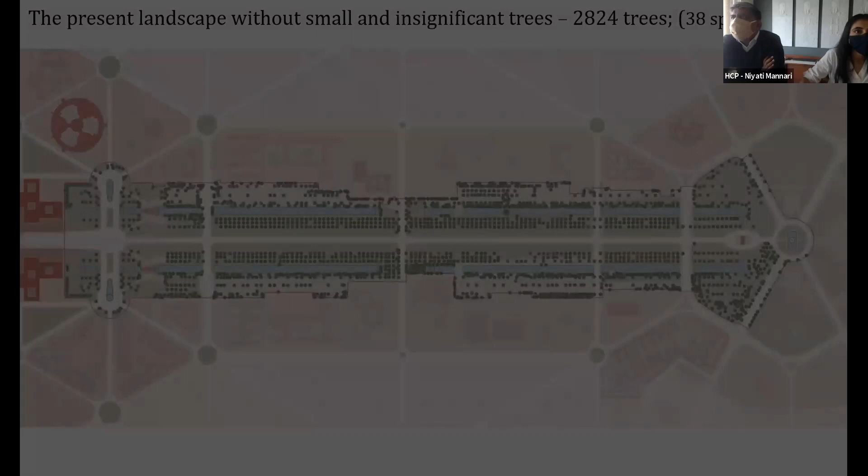Yes, so the numbers are... What do the numbers come to now, the latest thing? I'll just go to the existing, just a second. Niyati, may I take this and say it in a slightly different way than you said it? Let's go further back a couple of slides, go to the Lutyens plan before that. So the original tree landscape had around how much? 454 trees. Veena, can you hear what I'm saying?

Yes, yes. So the original tree landscape reconstructed from the pictures showed 454 trees, and they are drawn up here. And there were 4 species, right? Now go further, we did a very detailed survey.

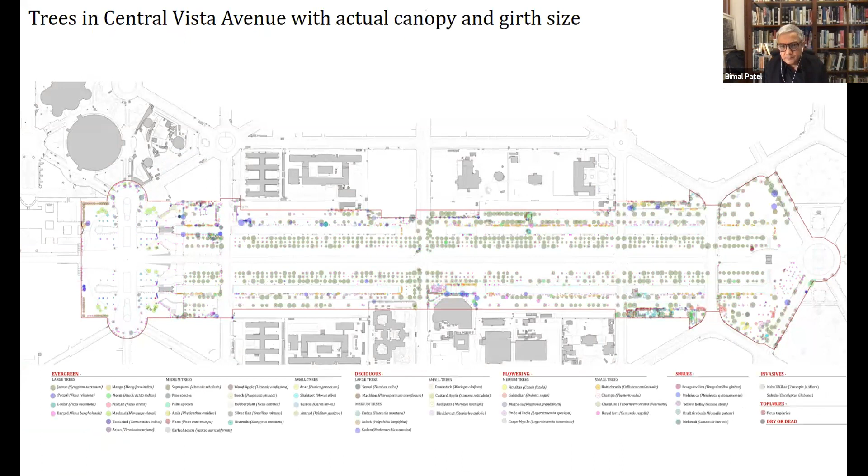Next please, next please. If you take all trees considered according to the Delhi Preservation of Trees Act, there are 4,289 trees and 44 species. You can see that the order has been lost and there is a sort of planting all over the place. Now, if you take away the invasive species, the bougainvillea, the shrubs and hedges, and the ficus topiaries, all of which are counted as trees according to the Act, then 1,465 are these sort of things: topiaries, hedges, etc. They're not in true form something you might call trees, at least not the bougainvillea, the hedges and the topiary.

Next, please. Now, even if you were to take them away, there's 2,824 trees there. That's still quite densely planted, and the original Lutyens tree planting intention is simply not there.

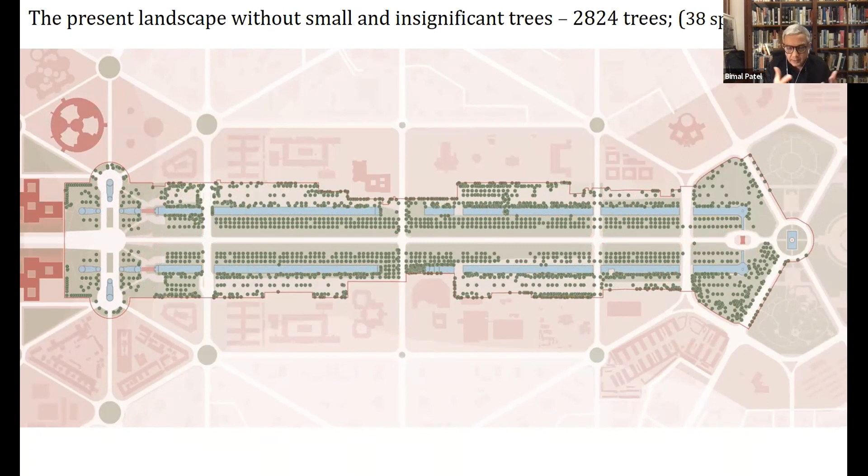Okay, so we did this. We are still in the process of developing a tree master plan, which will guide the planting henceforth. We are not talking about immediately cutting down trees, but we want a tree master plan that the horticulture department decides to honor over a 2-decade period.

And obviously, there's no question of going back to the 454 trees that were originally there. But our draft tree master plan shows 962 trees, and the pattern is being made up in this fashion.

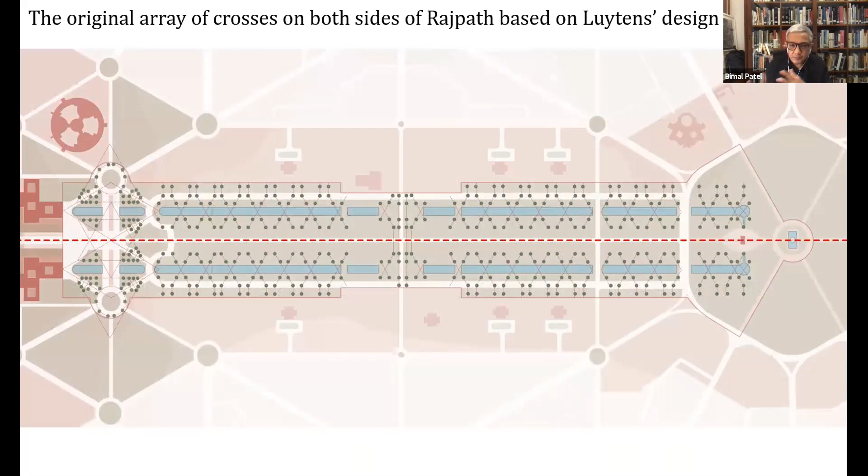Next, please. We sort of jiggled this, or shivered this across — shivered is the word Pradeep has correctly invented for this — and we came up with a pattern that looks like this. And then we go further.

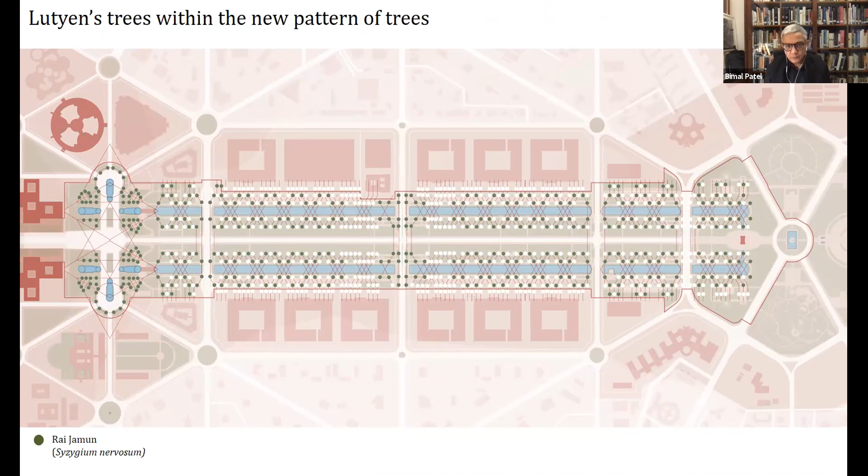And then we said, listen, are we going to stick to the original 4 species that Lutyens had thought of? And we said no, perhaps we can think of more colors there, but through foliage. And that's how this idea of some other trees came up. So next, and next, and next.

So eventually we said we'll keep the jamuns that were originally there, some more jamuns. Next please, and then we would use pilkans, and kosams, and amaltas, and something else, and semal. And we said we could create — this would be a master plan — so Barna there, next please, next please.

Oops, sorry, go back one slide. Yeah, so eventually you would get a pattern somewhat like this that becomes a master plan that the horticulture department would honor over a period of time. This is what we try to get to.

Now that would be over a 20-year period, that's what we are thinking — how do you slowly transform a landscape from one to the present? If this master plan is something that we do finalize, and it's by no means final, then there is about 1,000 trees in it instead of the original 454.

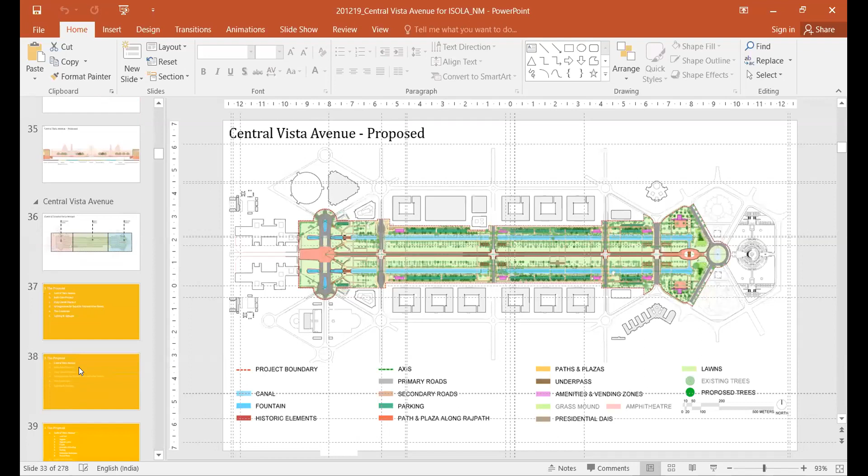I have two very minor questions. One, I find that the food courts have been taken — are they at a lower level? Eventually this entire stretch kind of works considerably, people come here. So could an alternative have been thought of, because it appears to me now that the food vendors are being considered some kind of a nuisance and hence they're being put out of sight. And that takes away the magic of that food vending process and the way people like to eat. So maybe I've misread the drawing and the design.

Nikki, can I ask you to respond to this? Nikki, please. Yes, I'm here, I'll speak. Wherever there's the building which are underground are the toilet blocks and the other utility facilities.

We do have consideration of the dedicated area for the food vending. So if you see this particular rendering, it is at the street level only and accessible from the street side where most people are walking. So vending is the first consideration in the entire project, where we have distributed across the length because they are random. Just now there are focused areas, yes, India Gate and the few junctions, and keeping those in mind and the vicinity of the vending spaces and their businesses, the places have been identified and at the grade level only and not underground, first of all.

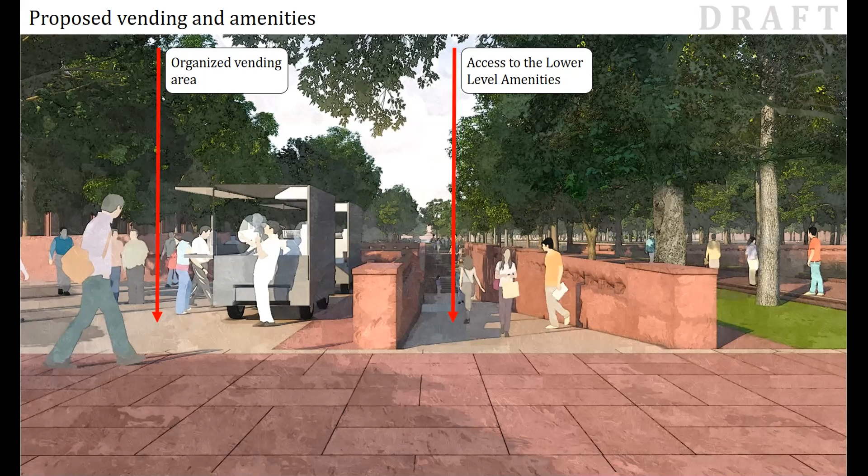So there are vending areas, organized vending. The mechanism of how this vending will be organized and what kind of design of those carts and everything will come through — currently the space has been identified. Only the area where in the India Gate, where the part of the landscape, we have the two sunken buildings, as Niyati mentioned, with the courtyard. There are few additional built shops, I would say, which can be converted into a food court and information center. So those dedicated places have been identified, which are sunken. But if you see the quality of the architecture and the spaces, they won't feel like sunken places. So those are the only areas where you can say the food courts are going to be sunken. Rest of the areas are going to be at grade level only.

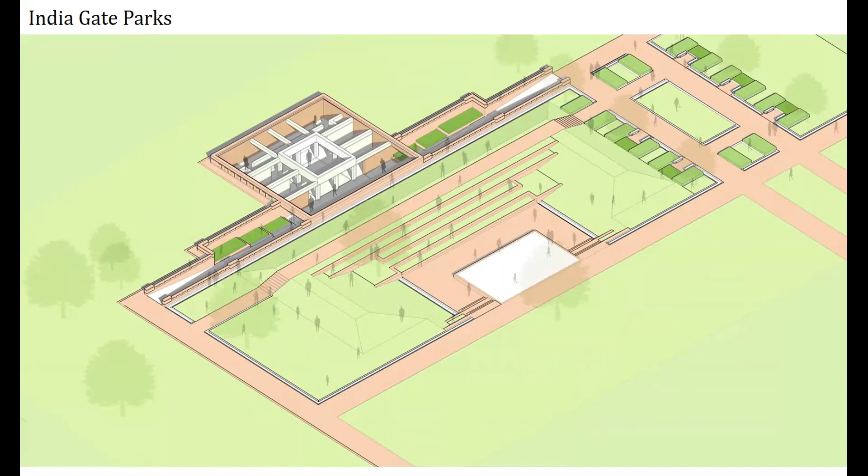Also, is it where the food carts are located — are they on the parking side? No, it's towards the street side. Near, you want to open the plan of one of the amenity blocks and the junction, I will explain.

Ghislaine, you're right, I think food vendors need to be where the business is, and the business is where people are. So it has to be — you assume they're going to be walking on the street side, which is near the edge, so when they come out of the parking, that's where all along the edge, yes, along the sidewalk. That's what we point out.

Yeah, it takes away from the — I'm just thinking. You have these cross connections, right, which are connecting it, you have these pathways, right, which are breaking that long stretch of the lawn. So can you not have some temporary spaces there, along that, and people can bring the carts — since these are mobile carts — because otherwise this is becoming... That's worth thinking about, yes definitely. Yeah, because otherwise now the parking area becomes one big food vending sort of a thing. So then we are making people come to that parking lot to eat, whereas they could buy their ice creams and then sit on the lawn.

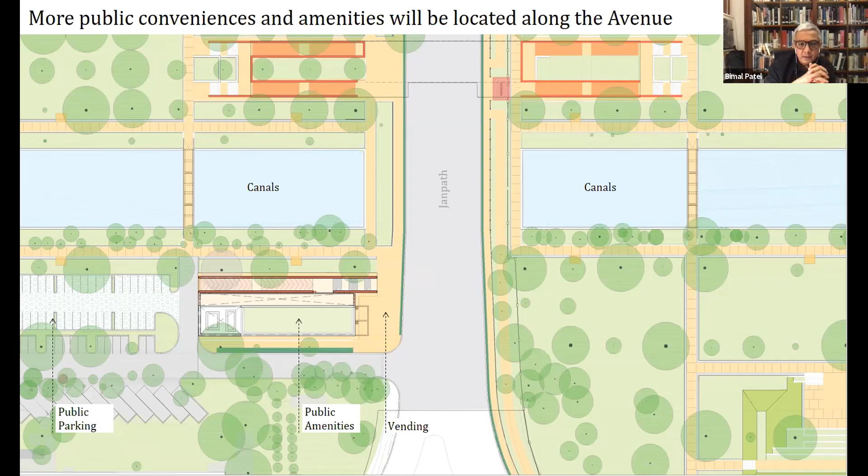Now, I have another question. Just the view, it's a complex, what do you call it, decision that you have taken regarding the trees. Many of the flowering trees seem more towards the outer side, and now you are imposing or introducing trees which were not on this site earlier.

So is that a better location to put the Cratevas and the amaltas? That means the benefit of those views is now largely for the buildings which are coming behind. And I'll answer that, Jasleen.

You know, the flowering effects are typically shorter than the foliar effects. The foliar effects last longer. And...

Basically one of the reasons why we suggested that we should change the monoculture of Rai Jamuns was that my reading of the British choice of trees for Lutyens Delhi was that they believed it was important to try and use evergreens everywhere. They also made mistakes about what was evergreen. But the evergreenness, I believe, is a mistake.

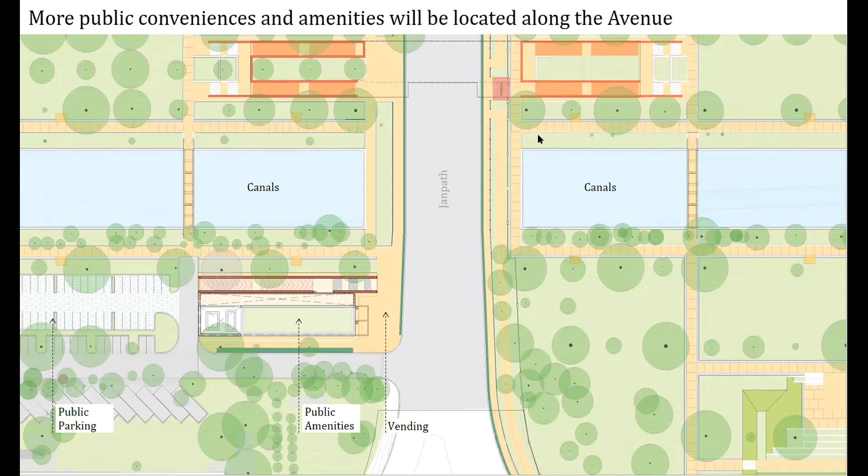I'm very happy to have a debate about this, but we do have to think of specific species, and then we have to weigh how they behave and when they behave, and things like that. I'm very happy to field suggestions and offer reasons why I think it's either a good tree or not a good tree. Okay, thank you so much.

Is it okay if I ask a question? Yeah, please go ahead. If you can see the planting plan again.

One comment was that you certainly don't want flowering trees along the main avenue, because the whole solemnity and dignity of that avenue will go if you have suddenly... Not the avenue, I meant somewhere else. I didn't mean the avenue. No, never mind, okay, I'll just finish.

It's a very elegant way that this has been done, with the shivering, so to say, of the x-axis being moved around. I have just one question: the Semal, Kaim and Amaltas are almost forming a whole line of trees which are very discordant in height. They'll all be leafless at the same time. So maybe that could be given a second thought, because that area almost gets treated like the back, with the parking, and then you have these trees which are not really matched, the heights are different. Some of them will flower at the same time and have different colors, so that looks a little discordant to me. Maybe one could give it a second thought.

One other question, if I can just finish. I also think that there is too much hardscape happening at the India Gate. If somehow that could be toned down a bit, it seems to be very busy just now.

Yeah, thank you. Shall I? Yes, please go ahead. Savita's first question. Savita, if you look at the position of the outermost rows of trees, north and south, they're coming behind a wall, which is the boundary wall of these offices.

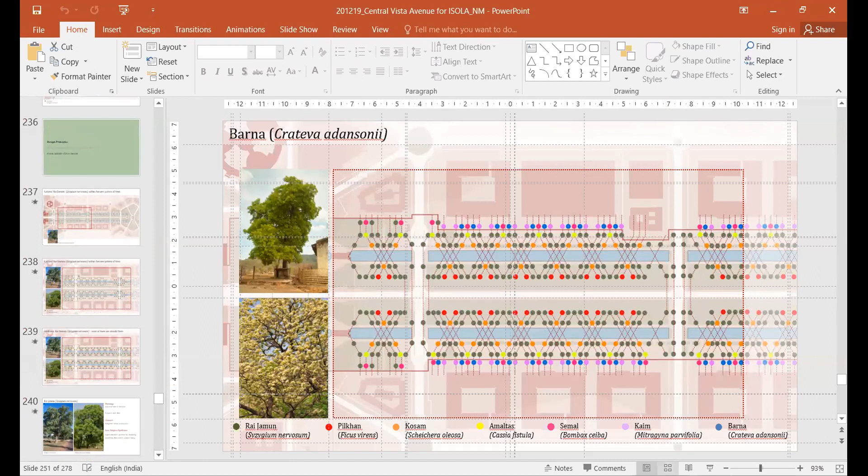And the footprints of the new buildings, the mini metro or whatever you call it, the train, and the impact of construction on and beyond the site. I know it's not a question related to landscape design at this specific scale of the avenue at Rajpath and along the canals. It's a much more important question, that as a project, as a site, from the Ridge to Yamuna, what kind of impositions we are making, what kind of understanding we have about ecological structures, functions, and ecosystem services - I think somehow that must have been part of the idea.

These are my respected colleagues here, and whether and how it can be manifested directly, indirectly, explicitly, implicitly - the ecological story, the human ecological heritage story, the cultural heritage story, as well as the natural systems and natural history of the place. We have talked about the cultural history of the place, the Lutyens era and whatnot, from Lutyens to now.

But this is such a significant project, and it is not a Delhi project, it is India's project. This is an opportunity for us to consider many tangible and intangible aspects at several scales. That is why I put down that comment, whether and how the design team wants to consider and take it forward or not. I have a few other points related to other disciplines connected to landscape design, but I won't take time right now. These are the questions, and I'm also open for further dialogue in the future if there is an opportunity.

I'll just quickly respond to that, if I may, as somebody leading the design team on this. I understand this is not an issue regarding the landscape, the central portion, the colored area we are showing just now - this is an issue you're raising regarding the project as a whole. I appreciate what you're saying. I wish there was another opportunity somewhere where we can discuss this. I think most of the issues you've raised have good answers and good responses.